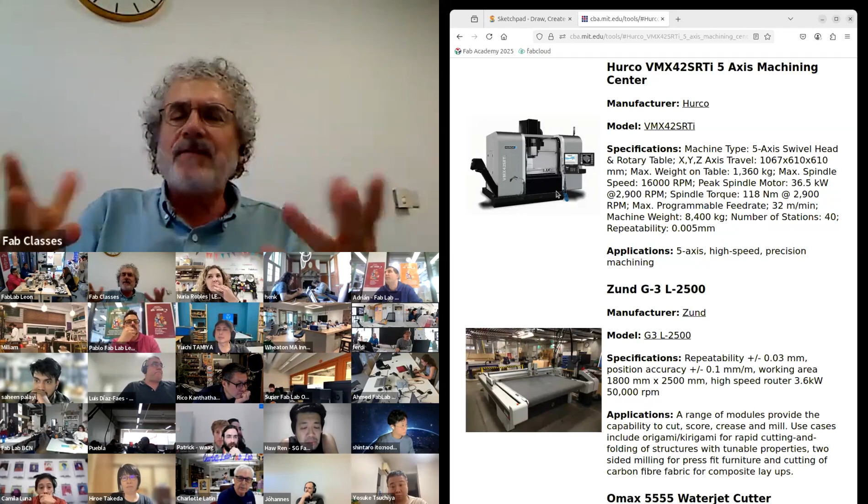So one is multi-axis machining. This is a big mill in my shop where it moves X, Y, Z, plus the bed rotates and the head swivels. Because we didn't make everybody do 3-axis machining for molding and casting, it would be fine this week. Even in the past, for make something big, that was 2.5D — you moved in a plane and then stepped down. Full 3-axis machining, where you move all 3 axes, is fine for this week, and if you have access to 4 or 5 axes, even more so. So one option is use this week to learn about full 3-axis machining.

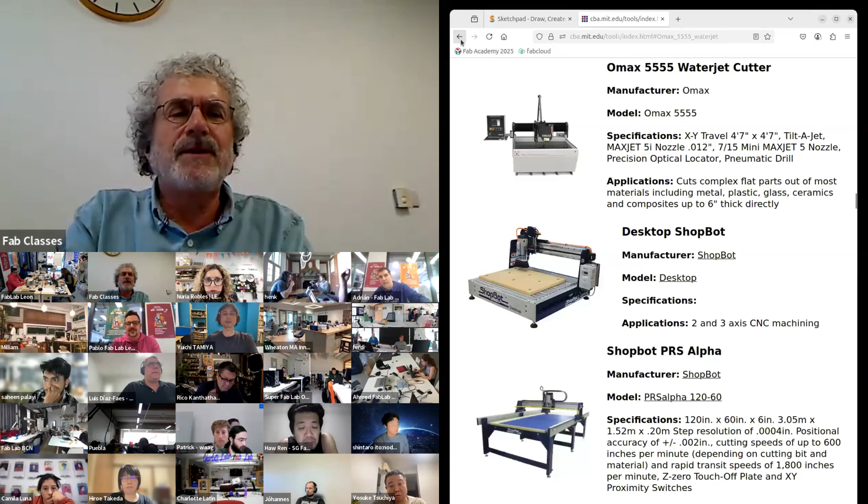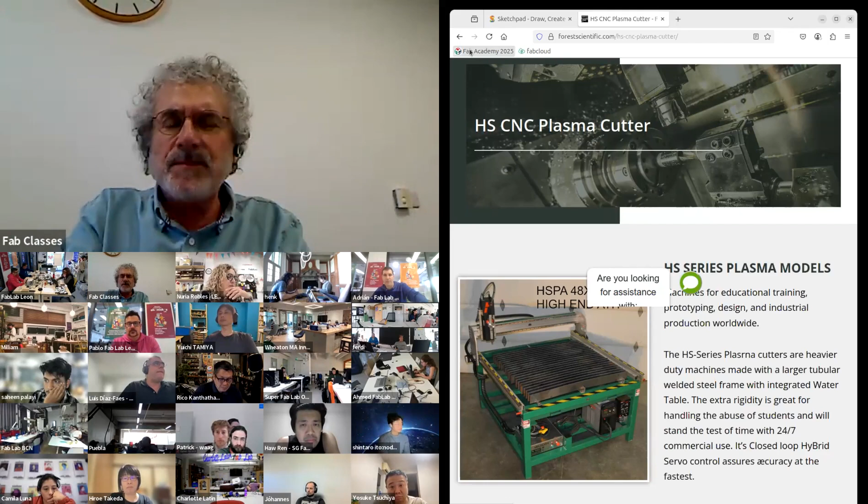If you have it, this is an electric discharge machine that uses a plasma around a wire for metal cutting. This is a big water jet cutter, but increasingly there's small tabletop water jet cutters that cut with a supersonic jet of water with an abrasive garnet that machines glass, stone, any material. Plasma cutters are another option for metal cutting, where it's a torch that generates a plasma. These make a lot of sparks and flames, so you need to use it similar to where you would use a foundry, but as an option for metal cutting.

Then this is a much higher power laser. Instead of 100 watts, this is a 1,000-watt fiber laser with enough power to do metal cutting with a laser. And then at the opposite extreme, this is a micro machining laser, a very high resolution laser that can make parts on the scale of microns.

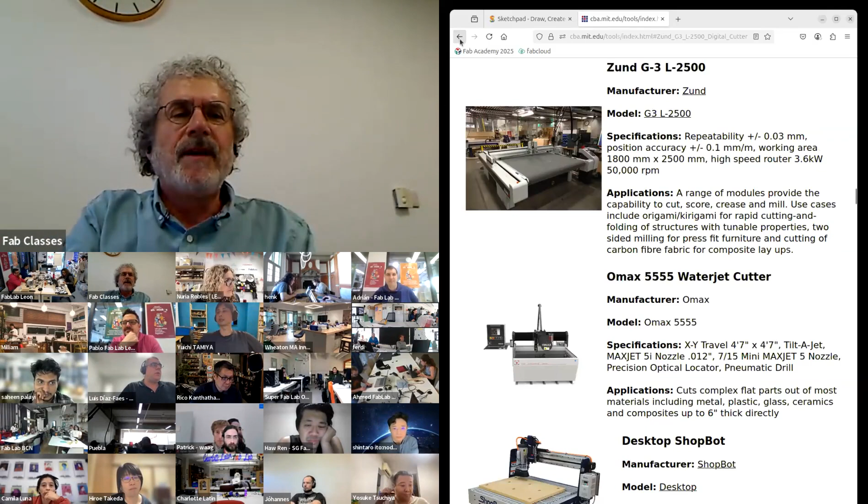So any of these — oh sorry, I missed one of our favorite ones. This is a giant flatbed cutter, like a vinyl cutter, but a 4 by 8 foot bed for large format cutting. So any of these would be options for machining. And again, the multi-axis you can do on a tabletop mill, but using all 3 axes to do rough and finish cutting, to do full 3-axis machining. So that's one option.

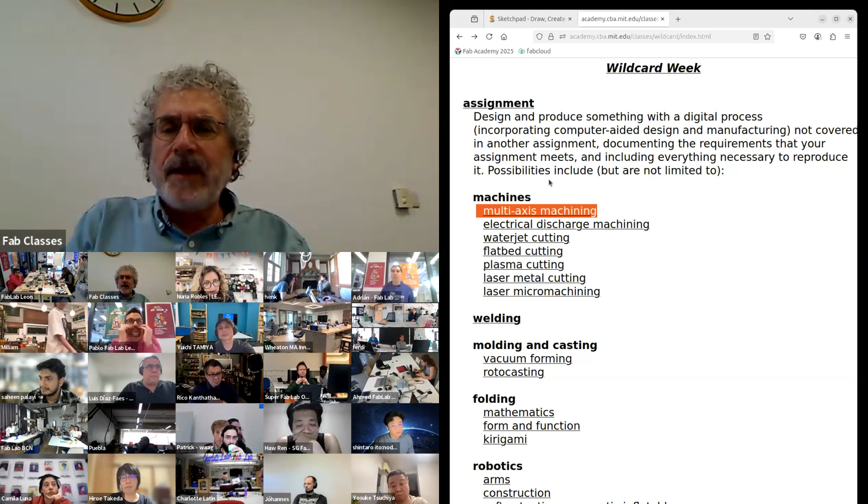If your lab is set up for welding alone, it doesn't count. But if you connect welding with these other tools, you use a computer to design the parts, cut them out, and then MIG, TIG, or spot weld them, using welding to join parts you fabricated with the other tools is fine.

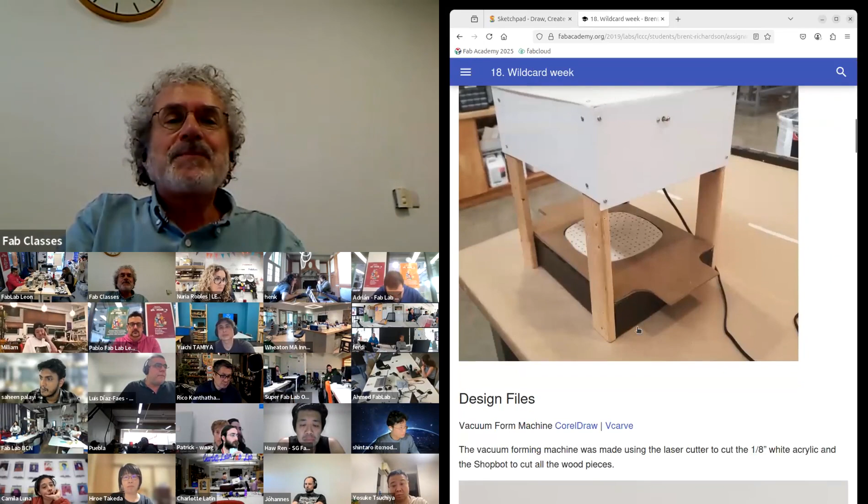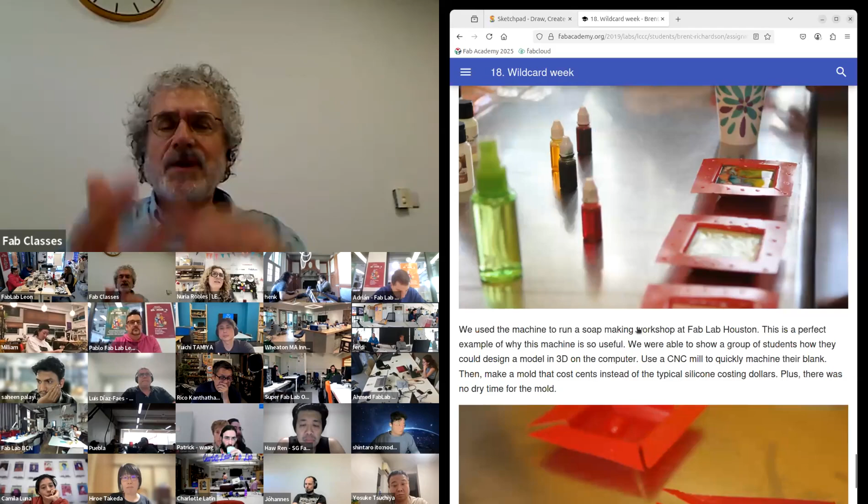Then for molding and casting, this was a fun project to do vacuum forming, where Brent actually made the vacuum former. The killer app for vacuum forming is packaging. You heat a plastic, soften it, and pull a vacuum. There are now roughly $1,000 tabletop vacuum formers that are quite capable, so that would be fine.

And then we saw in this cycle, one of the machine building projects was rotocasting. Rotocasting is where you tumble the mold and it coats the interior surface to make a shell rather than a volume. So those would be new kinds of molding and casting.

Then something sufficiently different is using the laser or the vinyl cutter, but for folding. Erik Demaine is a colleague who turned origami into a rigorous mathematical subject, and one of the things he's known for is curved crease origami, where he worked out the algorithms to fold these kinds of structures.

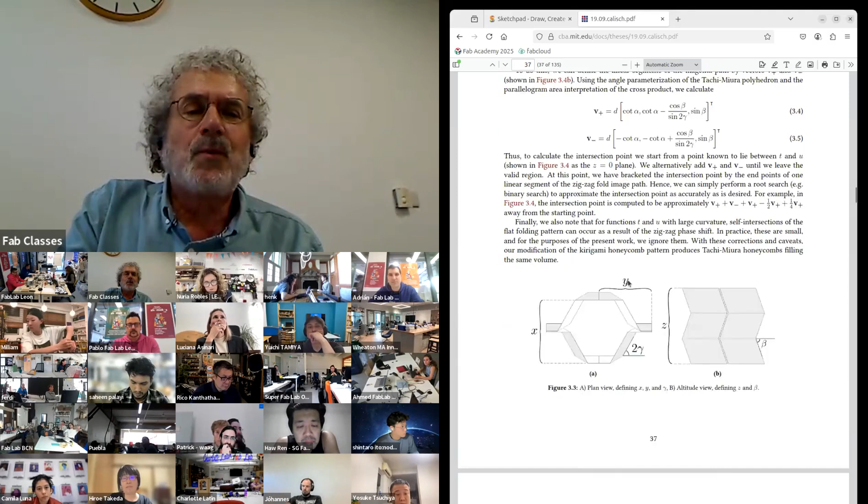So that's Eric. This was actually Sam, who made the kayak. This was his thesis with me, and he did a lot in this thesis. He showed, given a 3D form, how you make a 2D cut pattern to fill the 3D form. He designed machines to do the folding, then designed ways to tune the stiffness to range the elasticity, and then designed materials that either maximize energy absorption or maximize energy return.

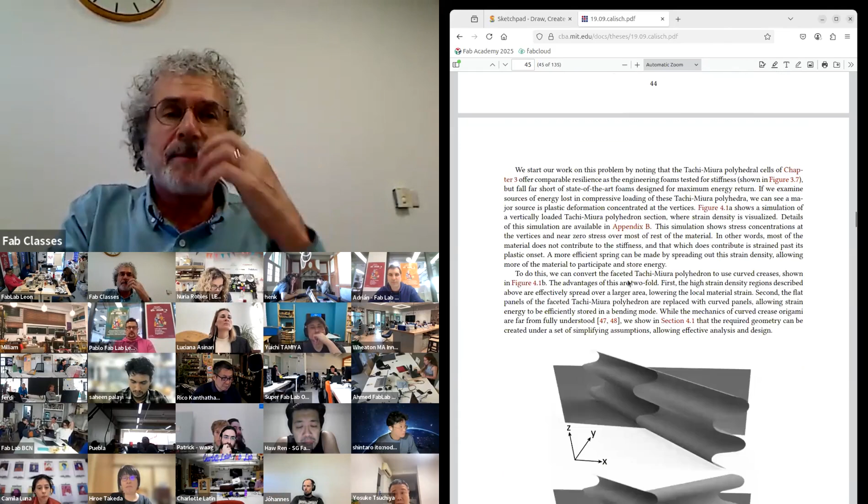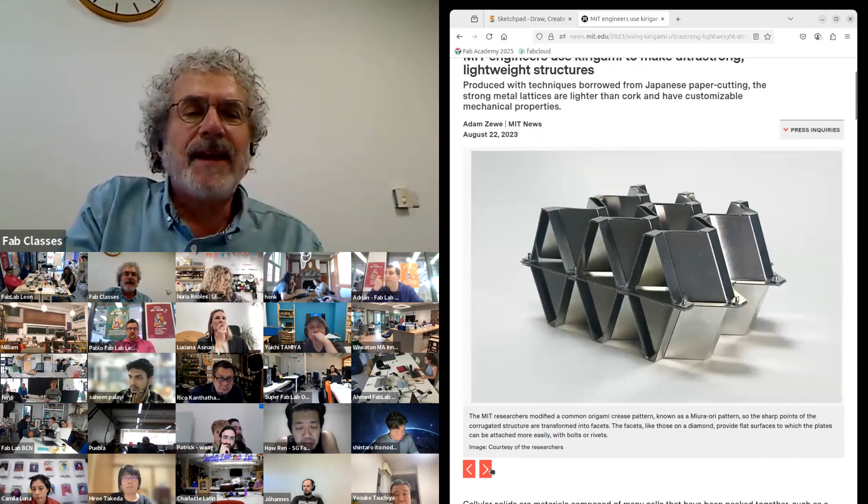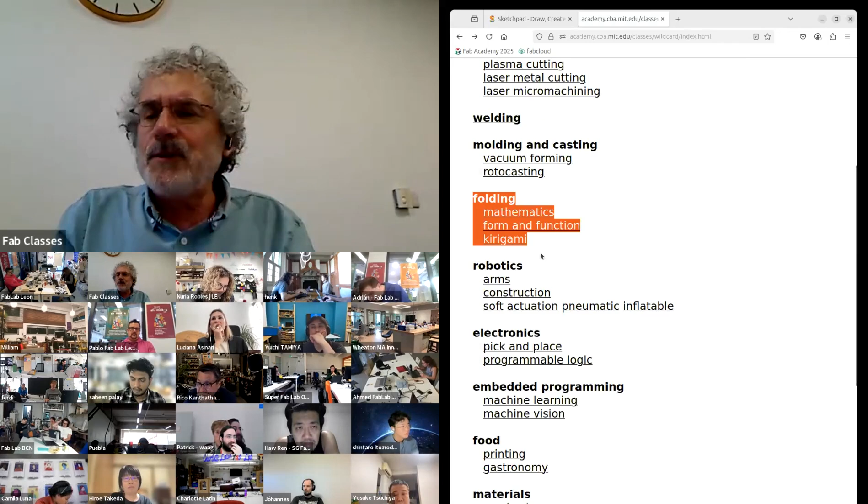This is an article on one of my students currently who's doing kirigami, and it happens he's doing it in metal, where once again he designs folds to fill 3D forms. Origami is folding with score lines; kirigami is having cut lines as well as scoring lines and folding. So for these, you use tools you've already used, the vinyl cutter or the laser cutter, but it's a completely different operation to fold with it.

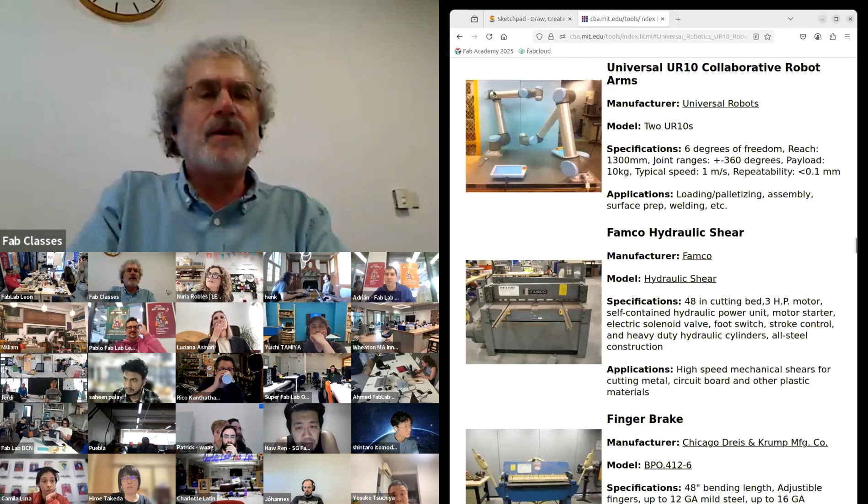Okay, next is robotics. So these are universal arms. Elephant Robotics has, let's see, there's some more links about folding. Elephant Robotics has cheap and cheerful, low-cost arms that are very general programming platforms.

So a fine thing for this week is programming robotic arms to do anything you want to do with them. It can be an assembly task, it can be processing, manipulating.

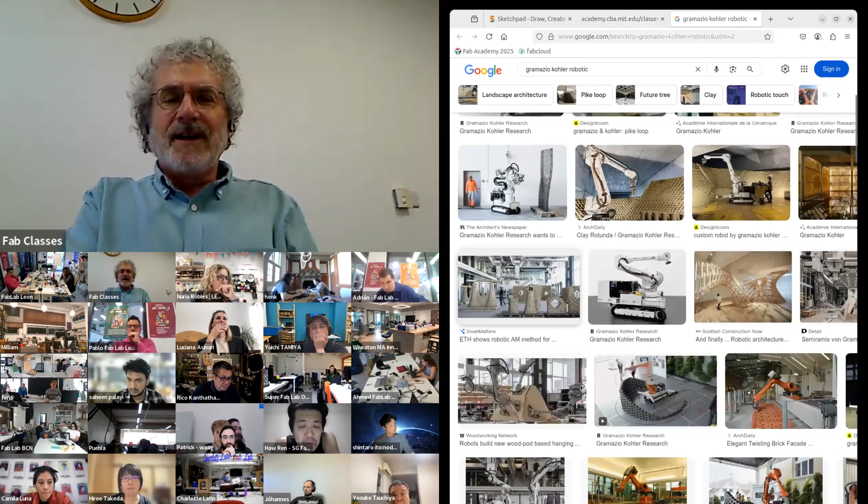For inspiration, these are colleagues in Zurich who program big mobile robots to do construction, to build by placing parts. They've got an amazing warehouse, full of these big robots as a test bed to make giant structures. So you can do robotic construction.

And then there's a whole range of soft robotics. This was Adriana, one of the gurus, and with molding and casting, what you can then do is make molds that you inflate with air pressure, and you can make grippers and manipulators and dexterous objects by, again, the skill here is molding and casting, but then by inflating it, it turns into very interesting actuation.

This is a colleague at Harvard who helped launch that field, and this is a good review of it, to make all sorts of deformable soft robots. This was a former Fab Academy student who developed this platform.

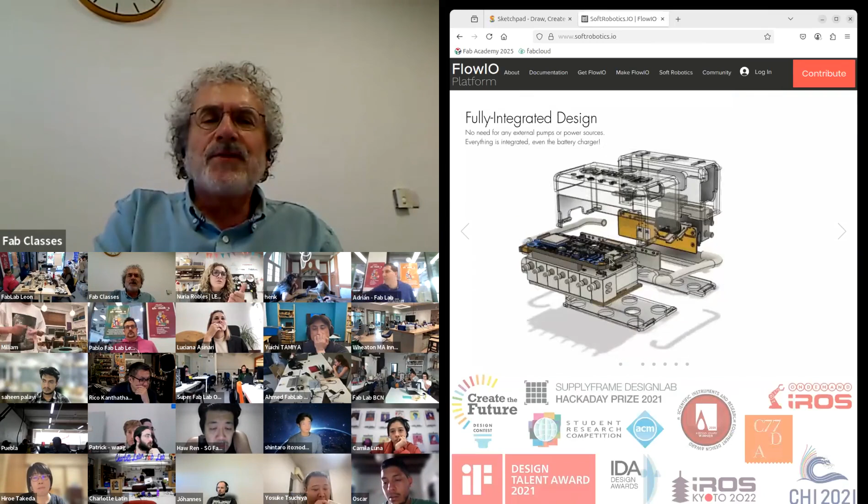For pneumatics, you need the pneumatic generator. You might want multiple channels. You need an easy programming interface to it. So we developed this really nice open generator for portable personal pneumatics. He's done a really good job creating and documenting platforms that let you make all these kinds of things.

So that's FlowIO. And then finally, a great thing for this week is inflatables. I showed this earlier, but I never get tired of showing it. This, again, is a company that includes, at the time—oh, actually this is funny, in a minute you're going to see Sam. So that's Sam. Oh no, actually that's not Sam, that's another.

But what's going on here is there are 3 bladders. They're sewn, and then by selectively inflating the bladders, you make, rather than a rigid robot, a dexterous soft robot. So that's robotics options.

Then this is a pick and place, and these have come down way in cost. I'll make a note to link the Lumen. Let me get to the right place in my notes.

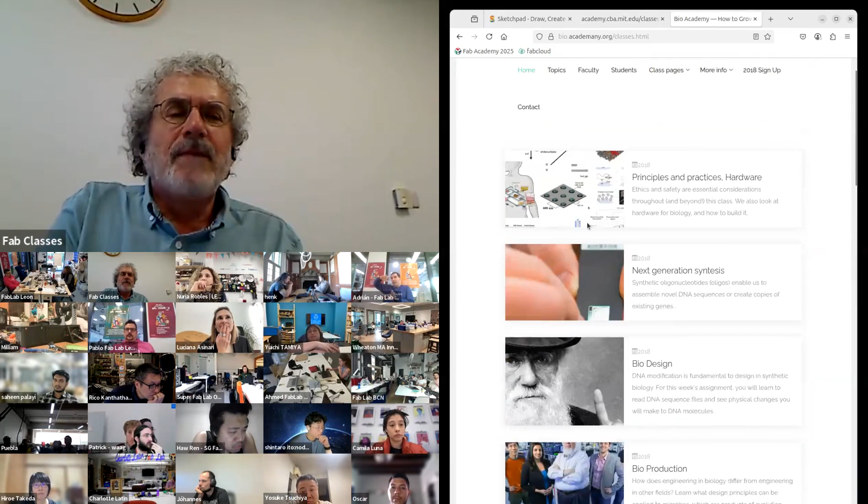iGEM is a really large collaborative competition in programming synthetic biology systems. How to Make Almost Anything has spun off How to Grow Almost Anything, which in turn inspired Bio Academy. That is a sister class you can take in the future. It covers all of these skills, but in particular many of these skills use tools similar to Fab Labs, but instead of manipulating bulk materials, you're manipulating bioreagents. So something in this space you could do this week if you have access to it.

Then come textiles. This is a nice recitation on everything to do with fibers: weaving, knitting, crocheting, felting, braiding, sewing, embroidering - all the different processes you can use to make things out of fibers.

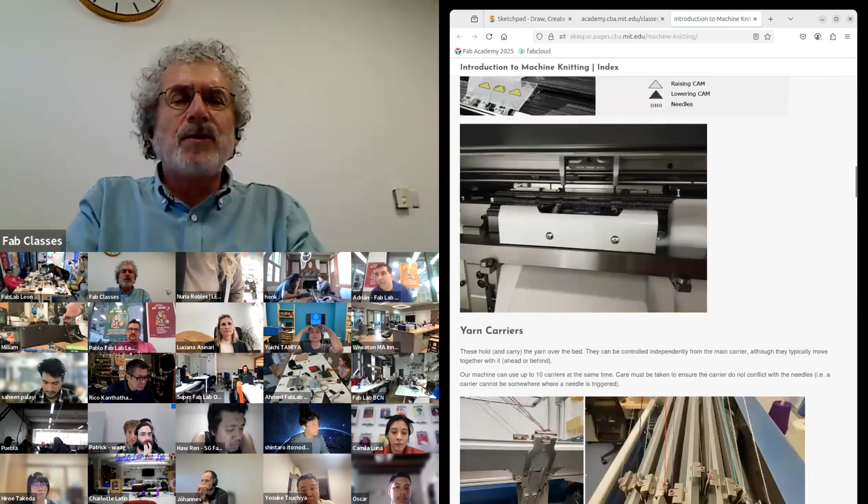This is a nice page on how knitting machines work, how you program them. These have come way down in cost - you can get programming attachments for these roughly $1,000 knitting machines. And this is a page on design for it.

This was an early student thesis in my lab on producing electronic circuitries by embroidering them. And the embroidery machines...

I'm not sure what the successor to this one is, but there are dedicated embroidery machines and dedicated sewing machines, but then there are these hybrid machines. Here's another one, but about $1,000. And what they let you do is conventional sewing, but you can also do programmable embroidery like this.

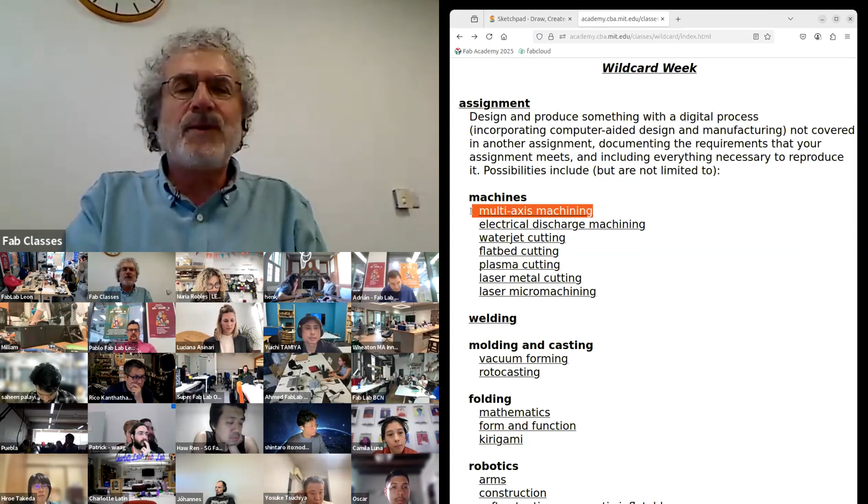Okay, that's the first half of class, and that's a non-exclusive list. This is to give you a feeling. If you haven't done multi-axis machining, I would urge that. That's a core skill we used to have everybody do. But all of these are good options, whatever excites you.

And then, let's see, Yuichi, what are you linking? Okay, this was embroidery in Wildcard Week. Oh okay, using this coded environment for it. Nice, good.

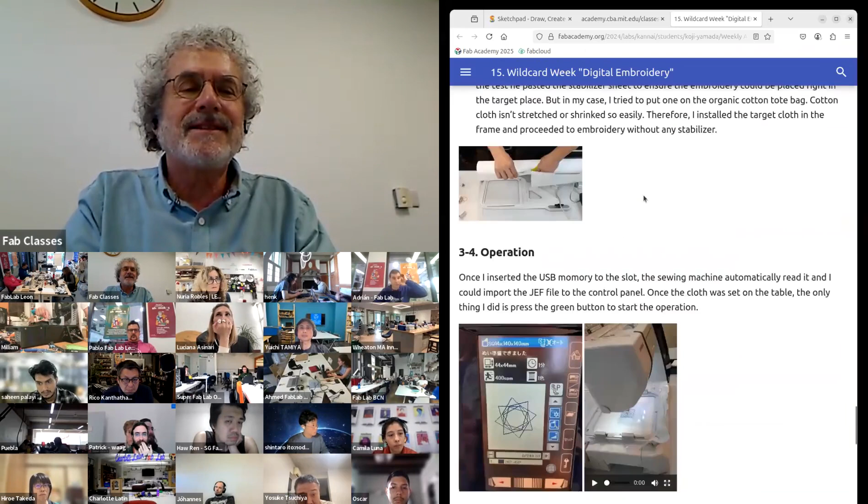Okay, now the second half of class is we used to have everybody do composites. I would say the vinyl cutter is the most neglected tool, and composites is the most neglected process.

Yeah, Richard was asking, and yeah Richard, I'm going to add that. Form Labs has a nice page on electroplating, starting with a 3D print and then electroplating a metal part. Absolutely, electroplating would count for starting with a commodity printer and getting nice metal finishes rather than a $100,000 metal printer. So that would be fine for this week.

Yeah, Patrick, dead bug, I wouldn't count, because that we basically covered that. Well, it doesn't count for two reasons. I introduced dead bug in electronics week, and then for this week's assignment, remember, there has to be a digital workflow that you can document and transfer. Dead bug is arts and crafts, it's manual skill training, so that wouldn't count.

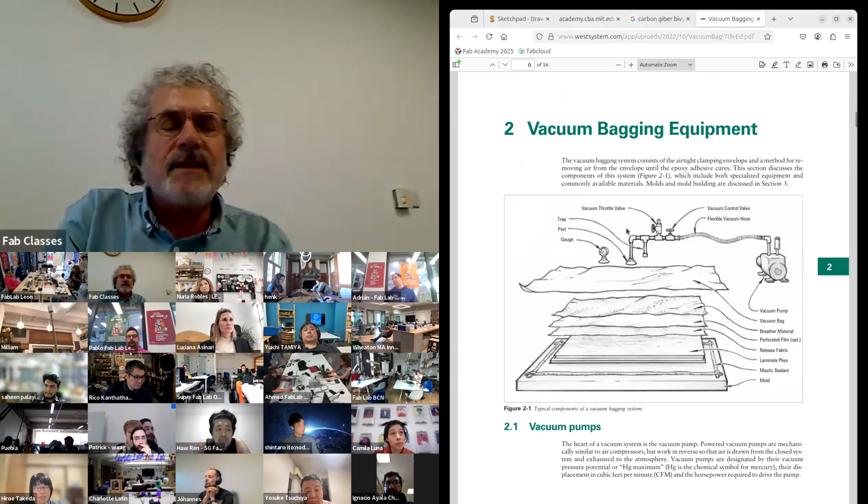And then a final thing you need to know is if you look at a carbon fiber bicycle... let's see. Stephen, did you find my broken link? Okay great, this is great.

This is an app note that shows all of the steps I just went through and talks about each of the steps for vacuum bagging. But again, I recommend learning how to do closed tool molding. So when you look at a carbon fiber bicycle and see that beautiful shiny finish, once you're finished the composite process, it doesn't look like that coming out of the mold. The final step is a clear coat. Typically there's a somewhat rougher surface, and then the clear coat goes over all of that to give you that smooth, shiny finish.

So to make the mold, there are many ways to do it. You can machine the mold, and so Kenny, who made the bicycle, in this case, he's machining a mold and casting this beautiful part in it.

I had talked about this was Kenny folding a mold. And again, if we, let's see...

Composite cardboard surfboard. So in the composite cardboard surfboards, it's a variant of folding the mold where you make a mesh in exactly the shape you want. You lay up the composite around it, and then you don't need to remove the cardboard. It stays in the middle of your surfboard. And in fact, you can make it opaque, but people admire these just because they're really beautiful looking.

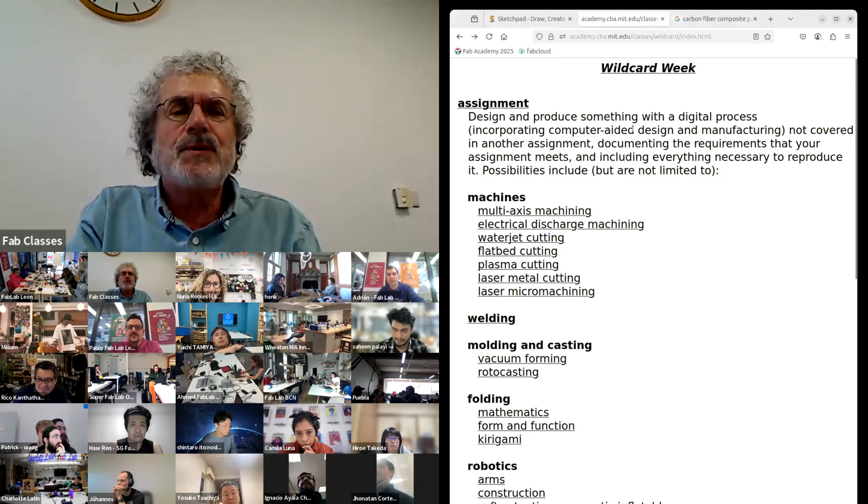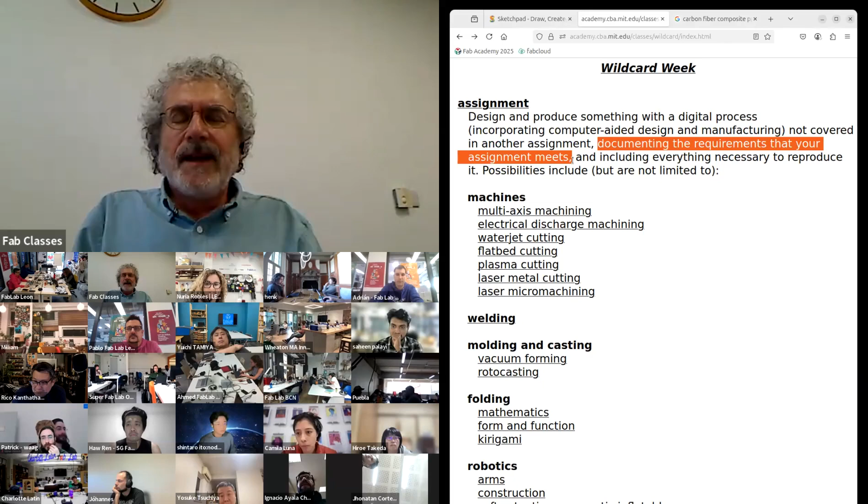What you do has to involve a computer in design and manufacturing. It has to be something we haven't covered. And very importantly, for this week, we don't tell you the assignment, you have to tell us the assignment. You could choose to make this completely unrelated to your final project.

Jacob is asking about the compression - it's the same for any of these. When you skin, you can either vacuum bag or do compression molding.

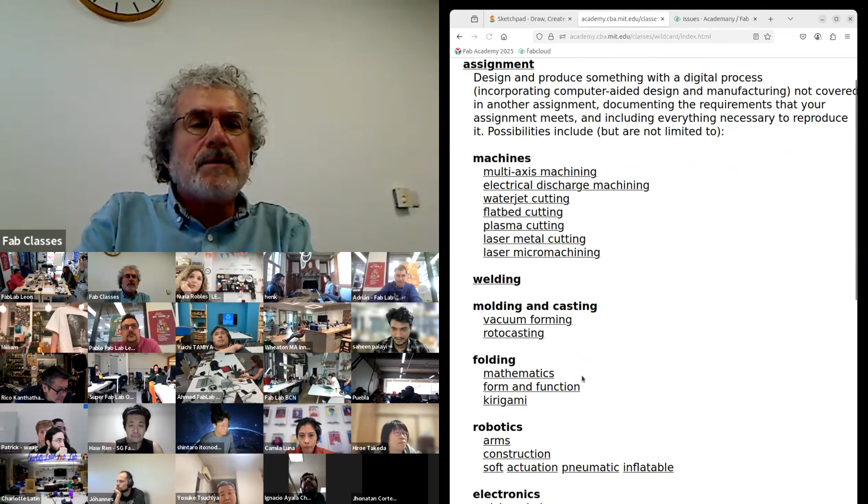So the Boeing 787, barrel winding. This is taking a tape and winding it over and over around a barrel, making the whole tube, the whole body of the jumbo jet.

Somebody needs to mute.

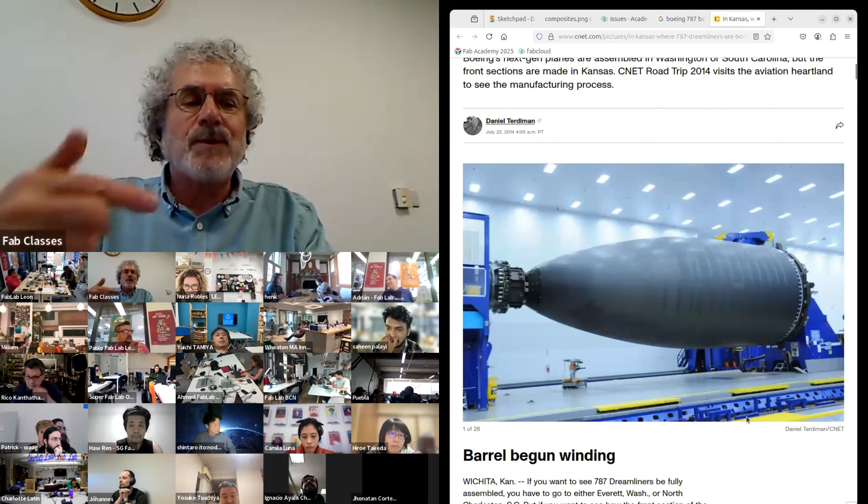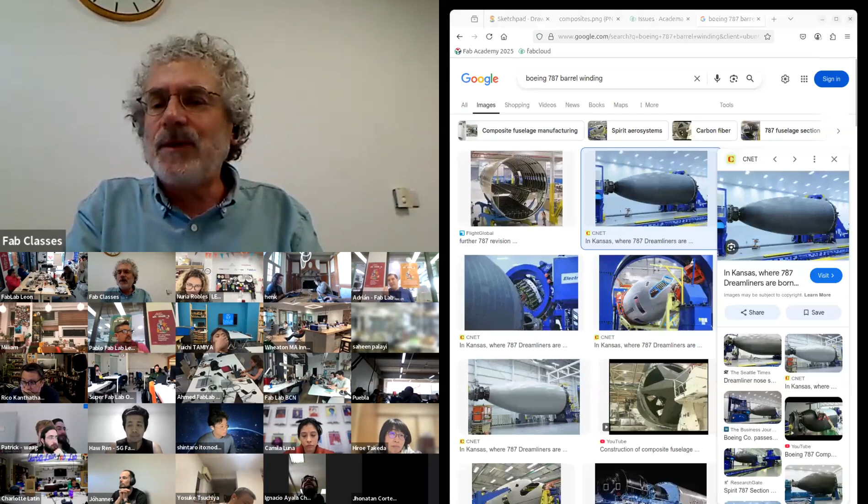This is doing, and I got to visit this factory. There's a mandrel, and then there's a tape. I don't know if it shows all the steps. And then you wind the tape around that whole barrel, and you make the body of a jumbo jet. So you can use this to make a jumbo jet if you want this week.

So let me go back to - as of today, you can sign up for final presentations if you're far enough along. In the review today, I'd say it was about 50-50 for who was ready and who wasn't. To be ready for the final presentation, you should have CAD for the final project, a system diagram of the elements, and a schedule for finishing.

So if we go back to the calendar, this week you're going to be doing Wildcard. You could veer off and do something completely new, but best is to tie this to the final project. Jacob, for the 787, it's pre-preg tape.

So the tape is already infused with the resin. They then wind it around the barrel, and then it goes into an autoclave where the overpressure comes from pressuring the giant autoclave.

So you're going to work from this week to this week. Next week, there's no new topic - I'm just going to give you a tour of final projects and fab examples. The week after that, then the week after that, I'll talk about managing invention and intellectual property. You have another week to work, and then you're presenting.